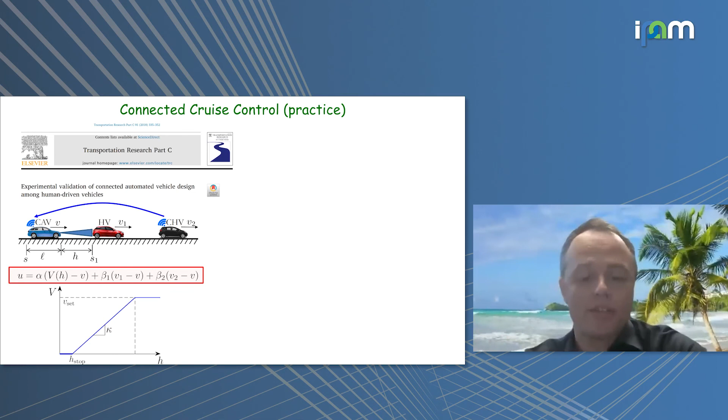So let me show you a simple example which we did at the University of Michigan. We are really lucky that we have a test track called M-City, and we are allowed to test these vehicles there. So what you're seeing here in the video is a sequence of braking, and the braking is getting harsher and harsher. The first vehicle is already braking like -4, -5 meters per second squared. That actually means that half of your weight is on your safety belt. So that's how you feel it.

And finally, the human-driven vehicle, you can see the pitching motion at the end. If I run the video again, it's actually doing 1G. So your entire weight is on the safety belt. That's a very harsh braking. And if you have, for example, not so good road conditions, icy, slippery road, you won't be able to make it.

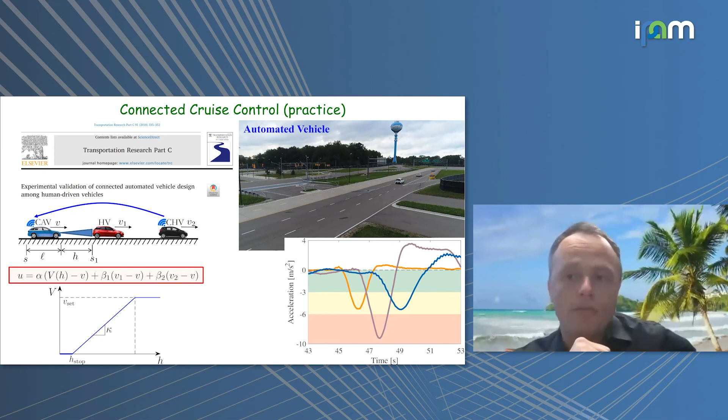Now, once you start to add automation, we basically ran the same thing, but simply running the ACC controller. After some optimization of these parameters, alpha and beta, you can see that the acceleration of the automated vehicle goes down to like -5, which is still quite harsh. If you do such a braking in real traffic, you would certainly feel it, but it's already doing much better than the human driver was doing.

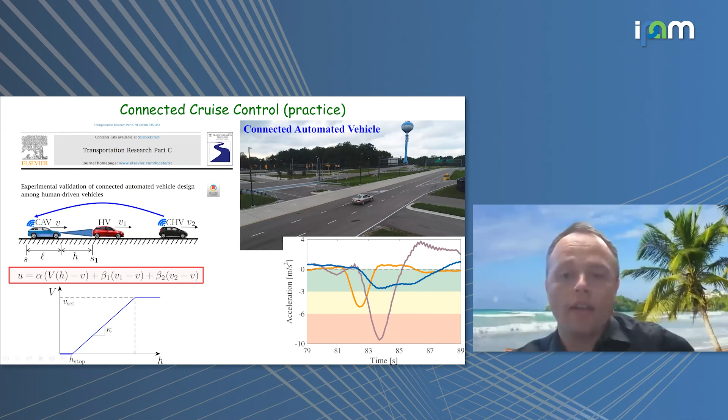And finally, if you really run the configuration which I'm showing on the left, you can see the vehicle is almost not braking. There's a little time when the brake light is on, but it's pretty much just gliding through the whole scenario. And if you look at the acceleration, it doesn't go below -3. It's around -2.5, which means you can drink your coffee when you are driving your vehicle, and you're not going to spill it. So we tested on the test track, and this was the simplest scenario we did.

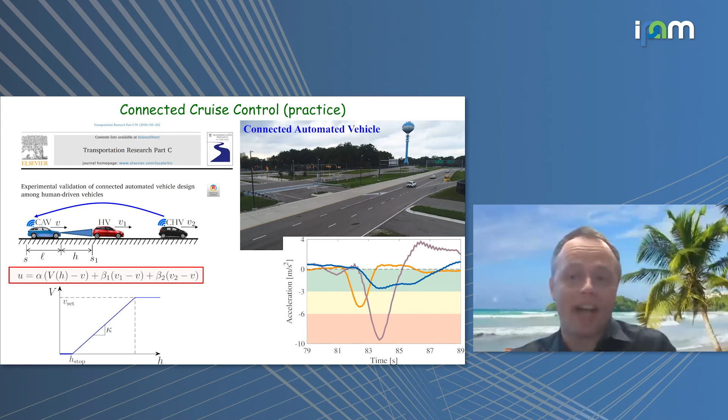So our next step is, well, Michigan has beautiful roads. Let's take it out. We found this beautiful stretch of road close to Lansing, Michigan. It's farmland, and it was really nice because it was about 8 miles of uninterrupted road. There are intersections here, but this road always has the advantage, so other vehicles have to give you the way. And this allowed us to start to test this technology on a real road. Of course, we wanted to be careful, right? So this was also a road where there was not much traffic. Actually, we made the traffic ourselves.

Okay, so we only had 8 vehicles, and the big question was always who should drive the Challenger here, because that was a V6 engine, and all the students wanted to drive that. But at the end, I think this guy here was the lucky one. He drove it the most.

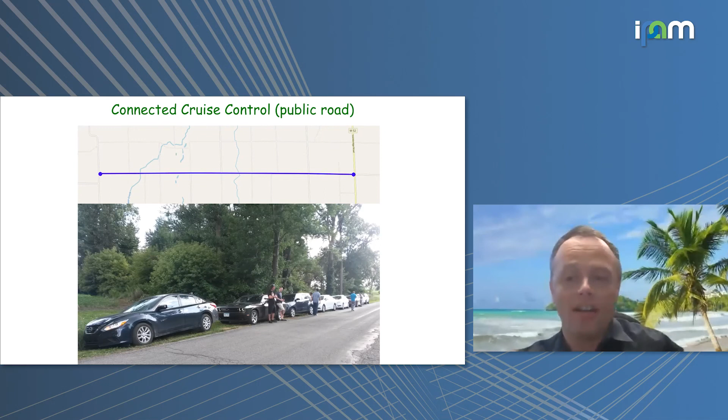So what we did with this, we actually started to test those very simple controllers, again, just a few parameters, and try to tune those parameters. After tuning them on the test track and understanding that we are roughly safe. I will come back to how safe we are and how we quantify it, but it was good enough to kind of run on the road.

And what we did was actually we just took these 8 vehicles and ran up and down on the road, back and forth. And in order to make it less boring, I was applying the brakes in the first vehicle from time to time, which meant that I produced these profiles, which resemble somewhat what you see in traffic, okay? And what you started to see is that as these waves propagated along the chain of the vehicles, they were amplified, okay?

So many people refer to it as string instability. And indeed, we made many, many calculations before to see whether our system is string stable or string unstable, but we could only ensure the string stability of the automated vehicle. So what you see here is that pretty much all the vehicles are increasing these velocity perturbations, but the blue vehicle is cutting back a little bit, okay? So this is roughly what you could do with ACC.

Of course, there are other opportunities. For example, you can increase your time headway a little. If you keep larger distance, then it allows you to mitigate these waves more. But in this case, we deliberately wanted to keep it tight because what we found in other experiments is if you leave large headways, then people often like to cut in front of you. I will show you some of the examples later, which we found on the public roads.

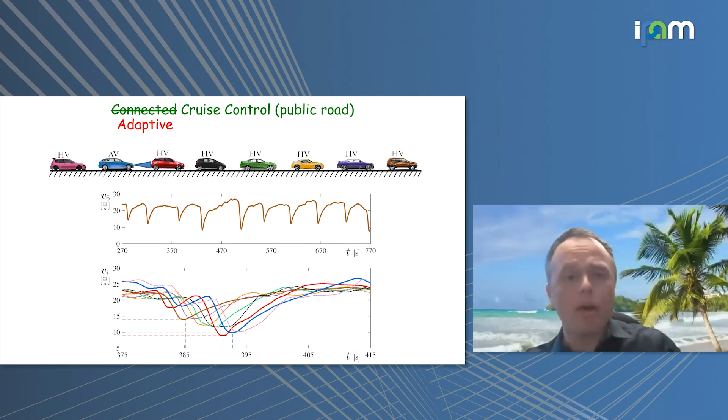So we started to add the connectivity, okay? And it shows an example that once we add connectivity, the blue vehicle is doing better, at least with respect to the red one. And the more connectivity we gave, and we tried a couple of configurations. I think this was the most connected scenario, where essentially we were responding to 3 vehicles instead of just 1 vehicle ahead. And you can see an obviously cherry-picked scenario where we are doing very, very well.

While the scenario is cherry-picked, we of course ran this experiment many times and we checked that indeed these benefits are there. You can start to see why these benefits are there. The blue vehicle starts to brake much, much earlier. If you see the other vehicles, they are kind of repeating what the one in front of them is doing. They're just pressing on the brake harsher and harsher, while the blue vehicle actually starts braking earlier. And that's what allows it to not reduce the velocity so much, okay?

So we published this work. And then while we were writing. If it's all right, we have a quick question from Benny. Benny, I'm going to go ahead and unmute you. Go ahead.

All of this builds on the controller that you mentioned in the beginning. I'm not clear. What is U, the control function U? Is that acceleration or is it speed that you command? It's the acceleration. Sorry, so it's second order dynamics. Okay, and then it looks like the control law does not explicitly exclude collisions, right? You're just adjusting your acceleration based on 3 speeds, so you don't have safeguards in there that kick in when you get too close or something.

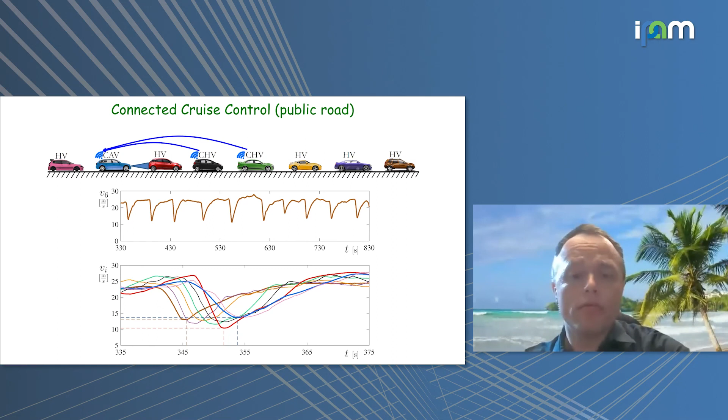So once we were actually writing this up, we found one of the benefits, which we can see in this case. Originally we were thinking about intercepting these traffic waves and really showing that this has an effect on the transportation. Well, we still believe that it would, but we only had 8 vehicles, right? So certainly this was not enough to show these large scale effects.

One way to bring that out is exactly how you guys did, Benny, when you basically put it on the ring, right? So that's one opportunity there. In this case, we didn't do it because we wanted to drive at higher speed. The speed limit here was about 55 miles per hour.

What we found is that energy-wise, however, we can see benefits not just from the automation, but also from the connectivity. Once we compare the least connected and the most connected experiments we were doing, where the least connected is basically the ACC, and the most connected is when we were doing this average of the three vehicle speed, we could see, at least in this experiment, 19% of energy saving.

Of course, the profile was particularly nice to see these benefits. So we are not claiming that for every vehicle you can do this. But we also saw something interesting: even the vehicle which was driving behind the connected automated vehicle was also able to have some benefits in terms of energy savings. So we got really excited about it.

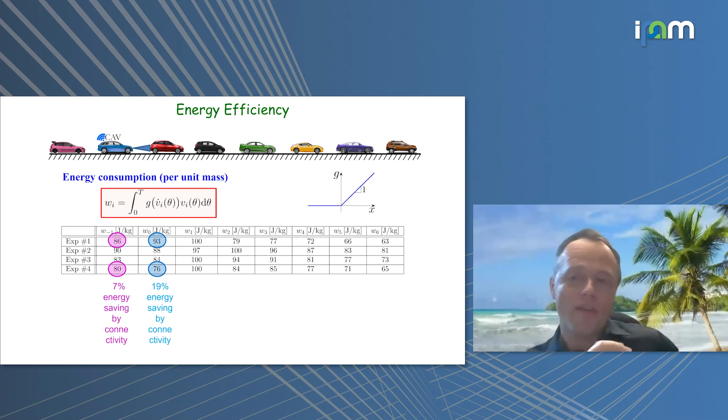And then we talked to some of the OEMs. In particular, we started to talk to a truck manufacturer, Navistar, and they found it interesting, but they said, well, let's check it out, because we have a little bit larger animals to deal with. And then they gave us this guy, okay? Without the trailer, this is 9 tons.

And certainly the power to mass ratio is much different from a personal vehicle, where if you really command that acceleration, you typically get it if you are not on a very steep road. But that's not necessarily the case for the truck. The other thing is the engine control unit; we had to dive into that and really play with a lot of things. It's amazing how complicated things are under the hood in one of those giants.

So what we wanted to do first is show that some of these benefits, which we were claiming based on the single road experiment, are somehow inherited by these large animals. And we were not expecting, of course, 20% fuel change just because we are driving differently on real roads. But our estimation was maybe around 5 to 10% improvement. So again, it's important to, yes?

Yeah, one question again, is the power to mass ratio larger or smaller than for a car for these trucks? So power to mass is smaller, if I said it the wrong way. This has a 300 kilowatt engine, which is like 420 horsepower, and 9 tons. Your personal vehicle has maybe a 100 kilowatt engine, 150 horsepower, and 2 tons, right? So this is really different.

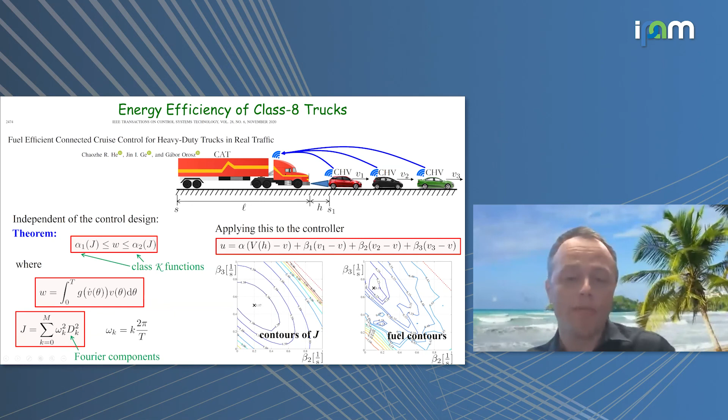And they were able to show that this we can actually upper and lower bound as a class K function of a very nice cost function. So that's what we basically started to use as our cost function from now, which is simply based on the Fourier amplitudes of your response. Of course, it's based on linear theory, but interestingly, it's very convincing how much it resembles the contours of this simplified cost function, which of course are beautiful ellipses. This is a linear system, and of course you can calculate all those Fourier components using some transfer functions.

Compared to the real thing, which in this case is actually run through a high fidelity simulator of the truck. So you can see that, well, of course there are many differences. This is very nonlinear, and actually in this case we are talking about the fuel, so even the engine nonlinearities and everything is included. But you can see that, at least for this controller, it allows you a very simple optimization. So you can actually figure out what these betas you want to put on your truck before you actually run on the road. So we found it very efficient.

And of course, the method does work for any other controller. It doesn't have to be this super simple one. We are basically just saying that we have a cost function which is very easy to evaluate and really fast. And basically what you can do is monitor the traffic in front of you and keep running fast Fourier transforms on board. That's super fast. Even 20 years ago it was very fast.

And then basically you keep tuning these beta parameters, which you wouldn't necessarily do every second, but maybe every 10 seconds or every half a minute. Based on how the traffic is changing in front of you, you can actually retune your controller, okay? And again, this is available for any other controllers, but we particularly tested it on this very simple one.

So this was really promising, but we really wanted to test this vehicle on the road, and indeed, safety came up, and Navistar said, whoa, wait a minute. This is actually a 9-ton vehicle. You can't just take it and drive it wherever, right? First of all, the person who drives it needs a CDL, a commercial driving license. None of us had that. And also, this is not a toy you just take away. So really we had to convince them that this is testable on real road conditions. So that's where safety came into the picture, okay?

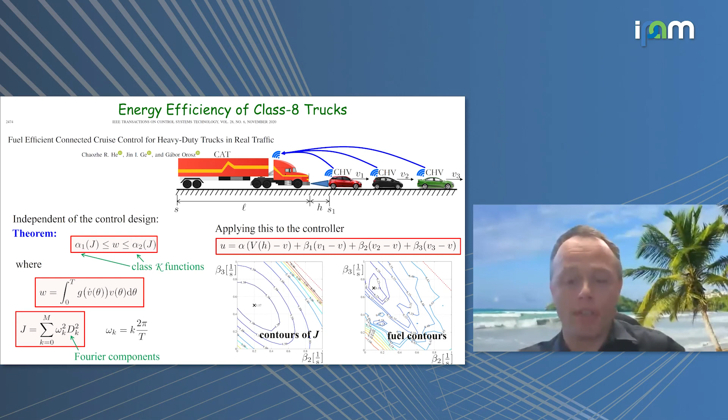So we'd run some tests with cars before in M-City. So you're seeing here one of the cut-ins. And these are one of those scenarios which we really wanted to get prepared for. Let me try to run it again. It's hard to see from the drone video, but actually in this case, the white vehicle was running with 10 miles per hour and the black vehicle was running with 60 miles per hour. So it's a 50 miles per hour difference. And it was very scary for the driver of the white vehicle, because someone was coming with really high speed behind him, and he's supposed to cut in with 10 miles per hour.

But we really wanted to test whether with personal vehicles, at least, we can ensure the safety. And it turns out that personal vehicles are not that hard. I will show you what we can do. But trucks actually really need some extra thing to kick in. So there are different ways people approach safety, and I'm going to touch on 2 of them today. One of them, which I'm going to spend the next couple of slides on, is barrier functions.

So if this is new, then I really recommend Aaron's talk, which he gave on Monday. Luckily, all the talks are recorded and online, and he has a very nice methodological explanation of how to build this theory. And of course, he has tons of applications in robotics. Okay, so this is going to be one of the approaches which I'm going to show. Another approach, which I'm also going to touch base on, is formal methods.

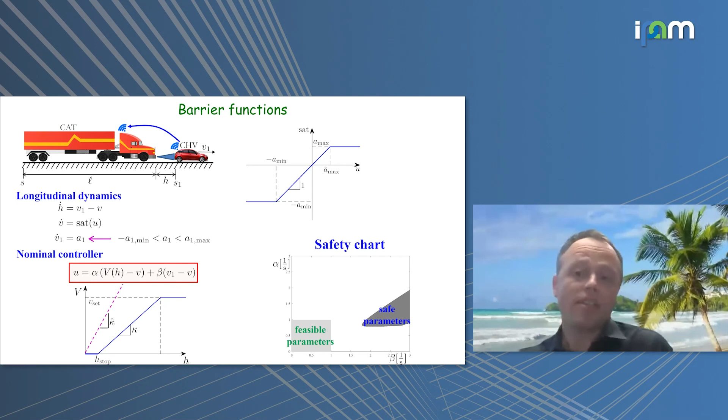So what it means is that for a personal vehicle, you can select an alpha and beta such that even this very simple controller is provably safe, okay? So that's right. But for a truck, basically, there's no chance, okay? So the only way to do it, to really do control barrier functions, means that at some point you need to switch to a safe controller, okay?

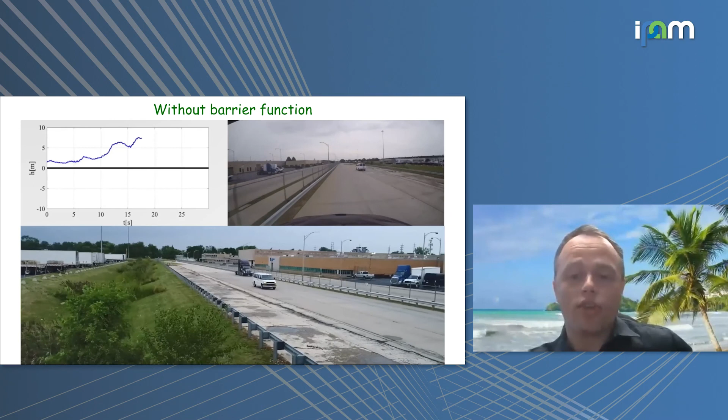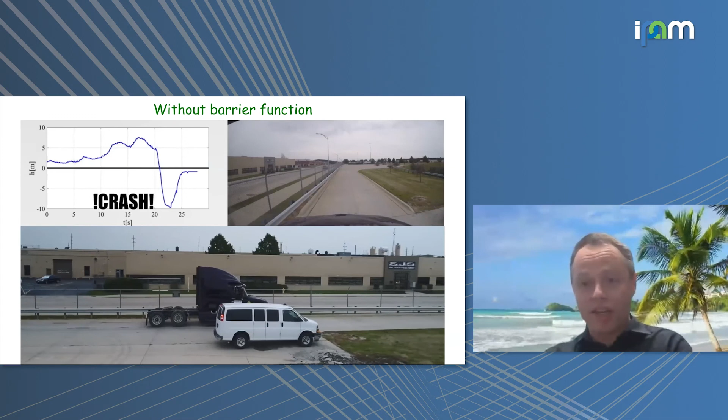So we tested this on a test track. You can see here that this is when we actually crashed the truck, but it's already unsafe way before it's actually getting close to the crash. And once you let it go, eventually it hits the other vehicle. So we didn't want to die in that little minivan. What we did is we were running in different lanes, but the connectivity allowed us to still run these tests. If you don't have connectivity, with sensors you have to have dummies and things like that. So it was really nice that we didn't have to do that.

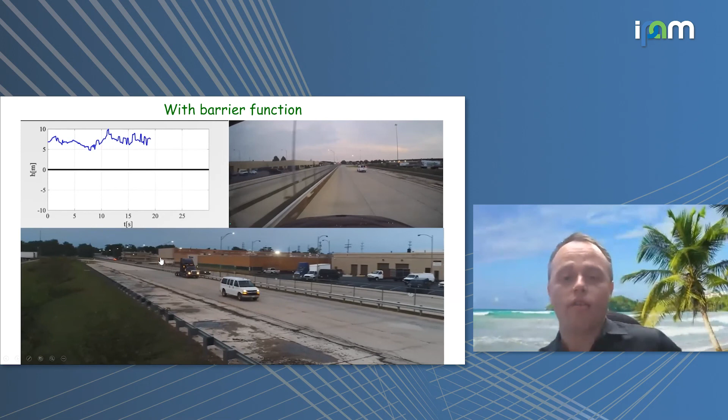And if you switch to the scenario when you turn on the control barrier function, it actually allows you to stop at a safe distance. Okay, so this is a really big difference. And once we showed it to Navistar, they started to trust us a little more, that maybe we can take this vehicle to the road.

So I really think that barrier functions have way more applicability in automotive control than this very simple one. But we are very happy that at least we were able to show that we can make these systems provably safe in experiments, right? That gap between theory and experiments is not always that little. But in the case of barrier functions, it was really nice because we basically needed one more line in the code: if this happens, switch to this. So that's a pretty simple way of coding. We didn't have to solve online optimizations and complicated things on board.

So now let me show you another video which we recently captured on one of our road trips. This is down in the south, that's why the weather looks nicer. What you see here is a vehicle that came and cut in front of us. It's a GoPro video, so it doesn't look that close, but trust me, this was close. At some point, the safety guy who was driving the truck with the laptop really had his fingers ready, in case the vehicle was going to have really harsh braking.

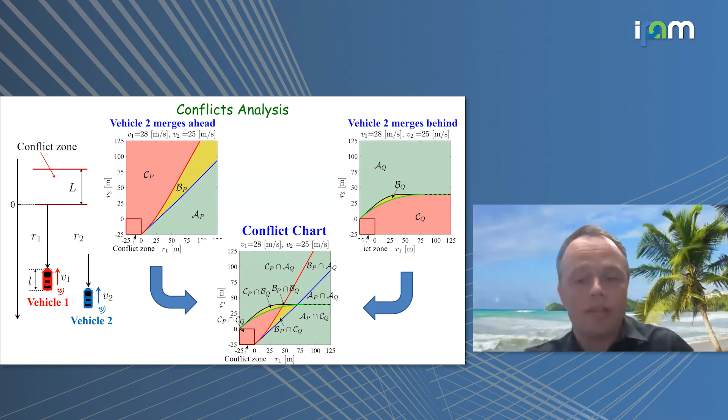Okay, so that's something which we haven't seen before, that there are these, again, some kind of manifolds in state space, emanating essentially from these corners of the conflict zone, as you can see, but they stretch out and we can actually use them in order to make nice decisions. So let me show a simulation. How does it work? So this is a scenario where we're actually merging behind the other vehicle, okay? And if I show you the animation here, these manifolds are moving, okay? But again, this vehicle at the beginning determines this is not a safe scenario. I don't want to go for it, and basically just goes after the other vehicle. In this case, actually, the red vehicle is real data. So that's real highway data, okay?

Now, if you look at another scenario, when the vehicle merges ahead, then again, what happens is that here it basically started to see early on that it can make it, and actually that's how it was able to do it, okay? So very early on, it made this decision, and again, connectivity is essential. When these simulations start, the two vehicles probably don't see each other by any camera or any sensor. There are concrete barriers, bushes, all sorts of elevation issues there, but connectivity can actually penetrate that. And again, they're actually not negotiating, right? So this is even simpler. You can imagine, for example, that the red vehicle is just a human-driven vehicle, which was the case in the data, and the blue vehicle is an automated vehicle. So it's simply just receiving those messages and trying to make this decision. Sure, you can do more and you can make them talk and you can make it more complicated, but we think that as a first application, it's a good idea to start this way.

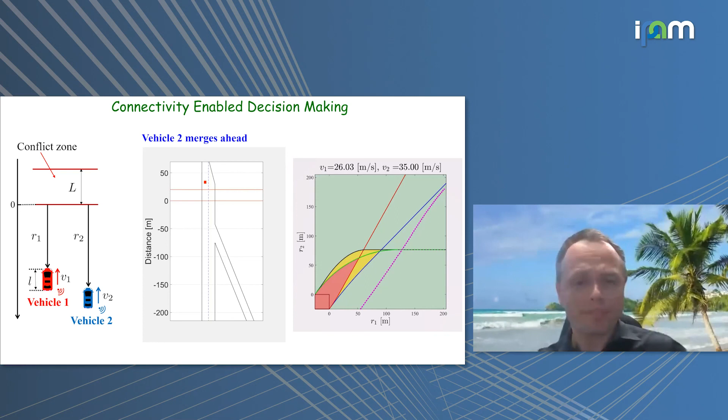Now, I need to wrap up really soon, so let me come to some conclusions. So again, we started with some high-level societal goals, and we tried to take those goals and translate them into the control objectives of connected and automated vehicles. So that was kind of where we started. We said we want to save energy, and eventually we ended up with certain optimizations. We also found that connectivity can help to achieve these objectives in a sense that it can make an existing, already well-working system more efficient, or it can give you capabilities which you don't have with pure automation. And finally, we found that there is a provable way to deal with safety, okay? You can use control barrier functions in order to ensure safety when you're getting close to the safety limit. But you can also use temporal logic to actually make decisions that are very, very far from the safety-critical scenario. So you basically don't even ever get into that safety-critical scenario.